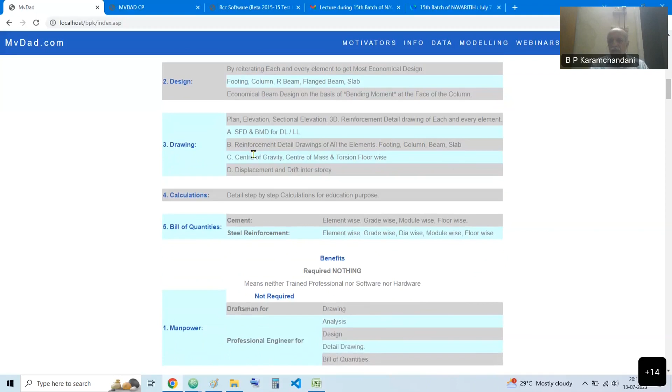These features are 5-in-1. First is analysis, which can do static as well as dynamic analysis for seismic loads. Second is design, by reiterating each and every element to get the most economical design for footing, column, beam, and slabs. It's an economical beam design based on bending moment at the face of the column instead of the center of the column. We are providing drawings for each and every element along with shear force and bending moment diagrams.

Then, earthquake parameters — center of gravity, center of mass, torsion, displacement, and drift. Detailed step-by-step calculations for education purposes, as we used to do during our education, so that students can understand how the results arrived.

Then we are providing the bill of quantities for cement, element-wise, grade-wise, module-wise, floor-wise, and similarly for steel reinforcement.

Benefits: we don't require any specialized manpower to operate this software, and we don't require any special tools — for operating software, drawing software, analysis software, design software, RC detailed drawing software, or bill of quantities. All these features are included in our MvDad.com.

As it is cloud-based, multi-location, multi-access, multi-user can use the software from their mobile phone or laptop, subject to internet connectivity. It's a green revolution — environment friendly and paperless. Modeling is totally automatic, which I will show you. We require only basic data: whether the building is residential or commercial, where it is located, floor heights, basement height, ground floor height, plinth height, foundation depth, bearing capacity, soil type, grade of steel, and grade of concrete.

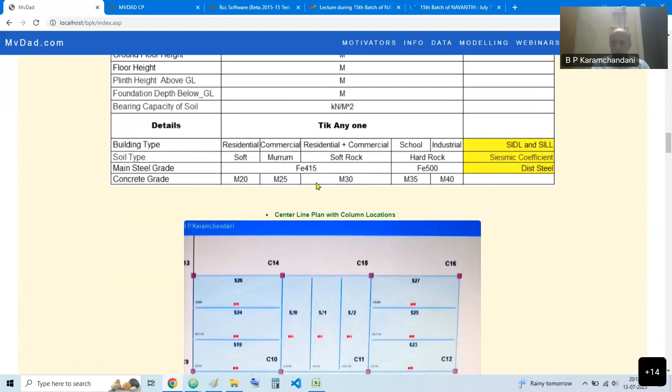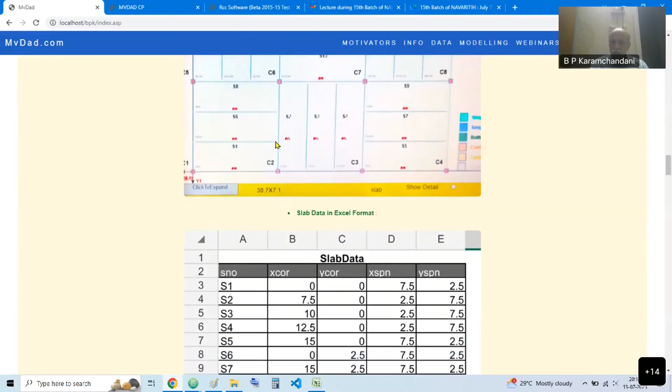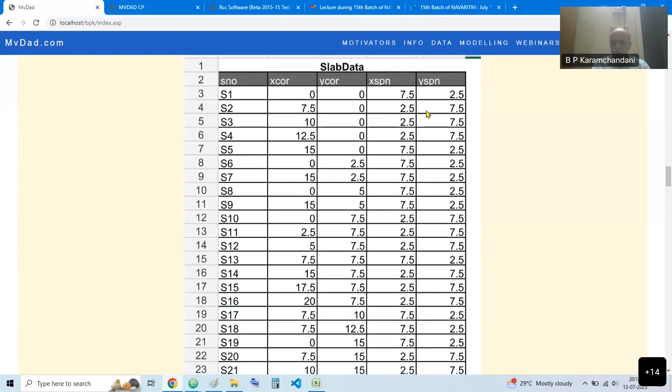From the architect's point of view, we require only the center line plan with column locations, either in drawing format or Excel format. We require the slab data: X coordinate, Y coordinate, span in X direction and span in Y direction. Similarly, column locations. These are the basic requirements for the new project.

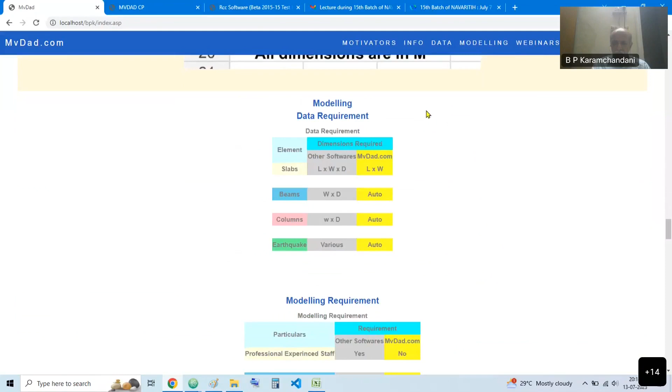Our modeling is auto modeling. Generally, all software requires all 3 dimensions - length, width, depth. Whereas in our case, we require only the slab dimensions, length and width. For the rest of the elements, beams and columns, we don't require anything from the user. By auto modeling, each and everything will be taken care of by the software.

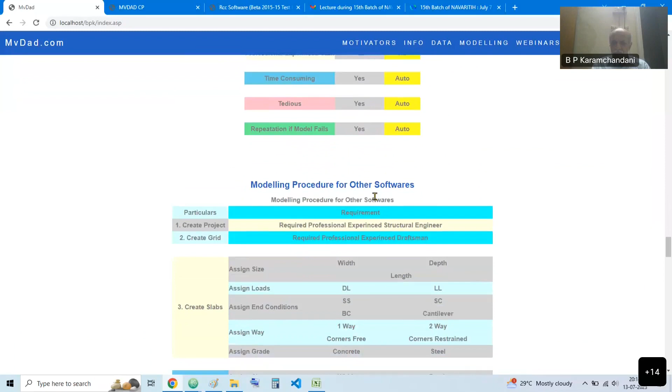This is the general procedure of what the software requires and how they actually execute it. Due to time shortage, we will overlook it.

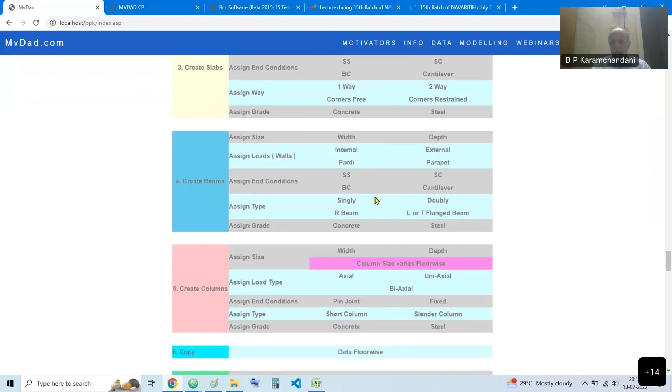One can have a look at our home page. Till now, we have covered 18 webinars across India, and we have provided them local support. And we have provided the actual program, exclusive program for students' education purpose. Now we will create...

Now we will create one simple project for understanding purposes - how the data is entered and created for the new project. We'll keep the name BMTPC, password BMTPC. Just noting down, time is 2016, so we can see within how many minutes we can create the data for the new project.

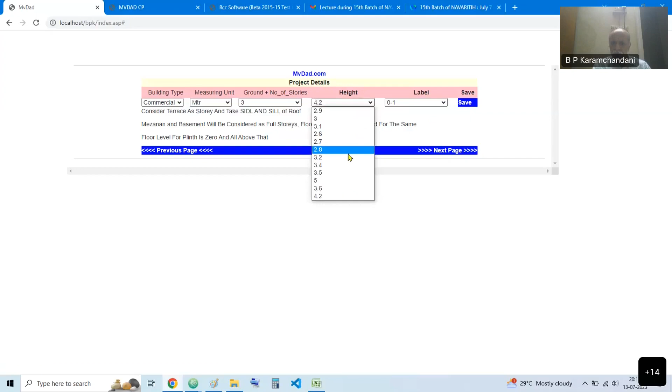Now building type - we are considering commercial building. Measuring units, meter. We are considering a G+3 building for the demo purpose, and we have the option for variable height for variable floors. We are considering 4.2 meters for 0 to 1 as it is commercial. For the rest of the floors, we are considering 3.2 meters - 1 to 2, 2 to 3, 3 to terrace.

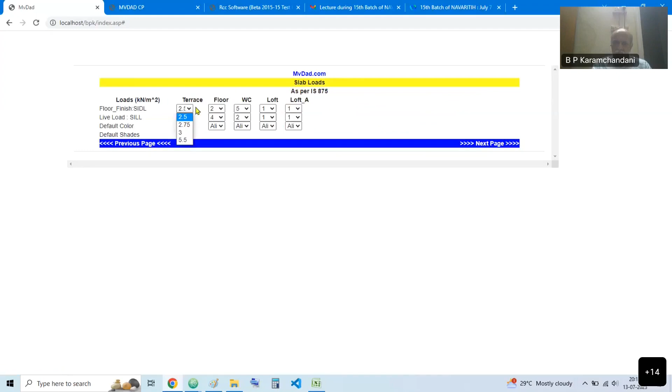As we have selected commercial building, according to the commercial building as per IS code 875, the terrace load and floor loads are incorporated by default. The user has the liberty to increase the loads, but is not supposed to decrease the load prescribed by the IS code. We are considering IS code loads for the demo purpose.

For walls: external wall 0.23 meter floor to floor height, internal wall 6 inch floor to floor height, parapet wall 0.23, height 0.9 meters. Plinth height, we are considering 0.6 above ground level. Foundation depth, we are considering 0.75 below ground level. The type of soil which we require for earthquake analysis is hard bearing capacity - user requires only the bearing capacity of the soil, which is variable as per the site situation.

Till now, we have selected the data from the drop-down boxes. Only the bearing capacity of the soil have we entered manually. That means minimum data is entered by the user, so there are minimum chances of error. We are considering M25 grade of concrete, main steel Fe415.

There are 3 ways of creating the drawings. Just let me show you the first option - to create the slabs from the Excel format. They are nothing but slab data, BMTPC, in Excel format. They are in this format: X coordinate 0,0, Y coordinate, X span, Y span. All the spans we are considering as 5 meters at the distance of 5 meters, with number of slabs 12.

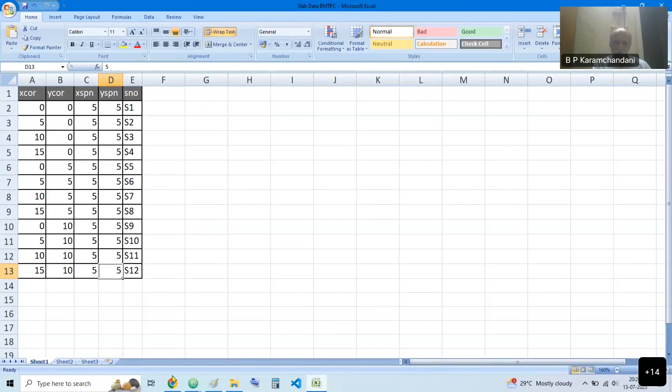Now we will give rights to the user to proceed further. These are the options we provide as per the user - for project management, all the rights; for site engineers, limited rights; for site supervisor, limited rights. Up to terrace, the project is active. So now we can log in this.

Within 5 minutes - 2021, we started at 2016 - within 5 minutes we have uploaded the data. Let's check what data we have entered for that project. We have selected commercial building, unit meters, number of stories 3, variable floor heights 4.2, 3.2, slab loads as per IS 875, wall thickness, width for earthquake, location of the building Assam, foundation plinth height, foundation height, bearing capacity of soil, grade of concrete. That means only these data are required from the user, and within 5 minutes any layman can enter them.

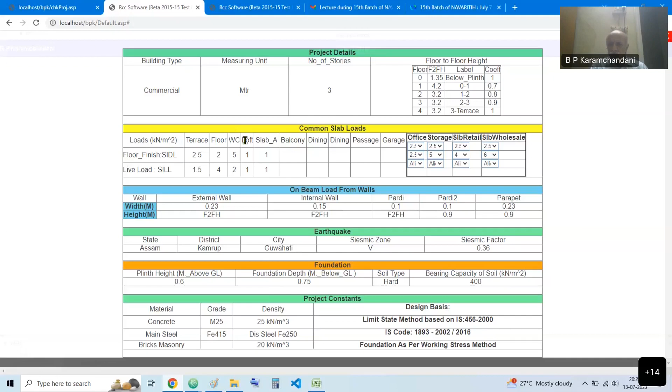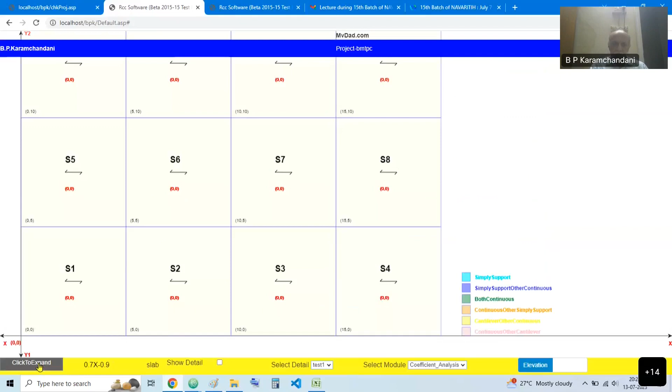This is the floor menu. We will select floor one. Main menu - click anywhere, main menu will appear, slide. We have entered the data in Excel format, and those data converted into graphic format. That means it's very easy to convert the data. Now we will copy all the floors. On canvas, copy floor from first. Floor 3, copy from 1. Floor 2, copy from 1.

Ground floor, floor 0, copy from 1. We have created the slabs on all the floors: 0, 1, 2, 3, 4.

Now we will go to the next column on canvas. Just click on the location twice: column from 0 to top, rectangular in Y direction or in X direction. We are considering corner columns in rectangular format, and they should move in the Y direction.

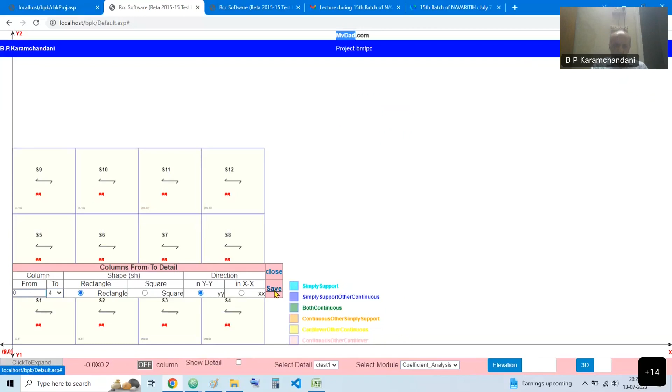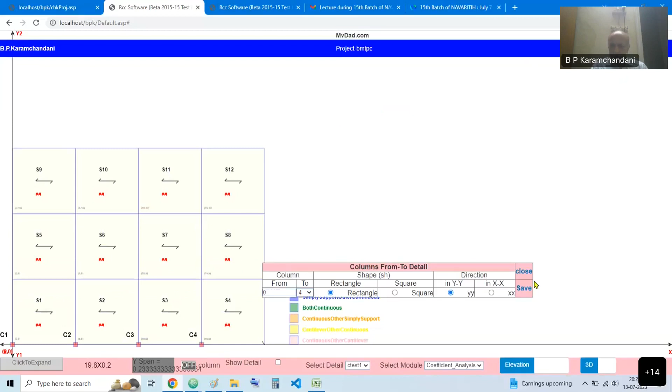Created 1, second, third, fourth, fifth, sixth. All these internal columns we are considering square.

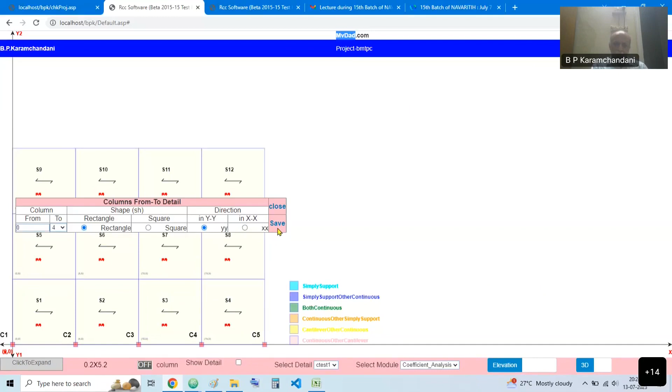Number of options are available. User can select as per the site situation.

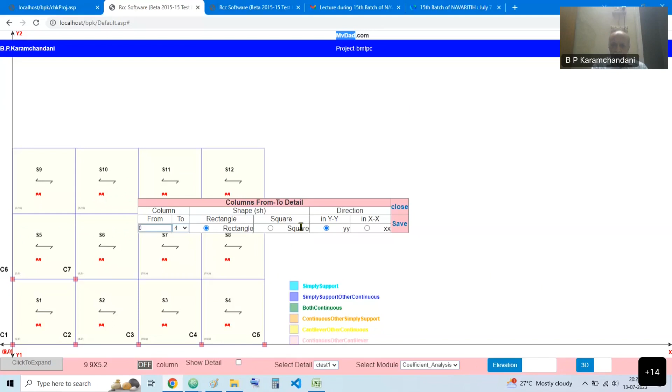We are considering rectangular. We have created 10 columns. Rest 10 columns we have to create.

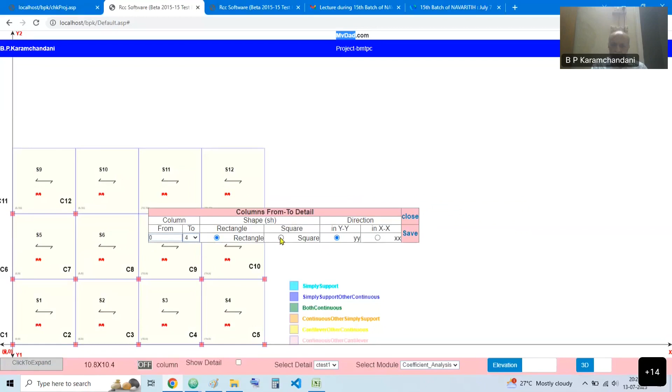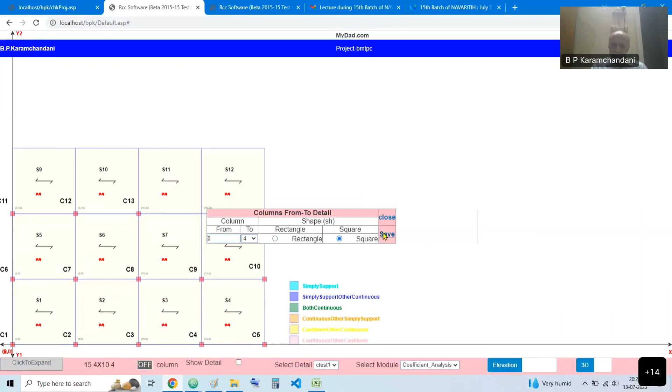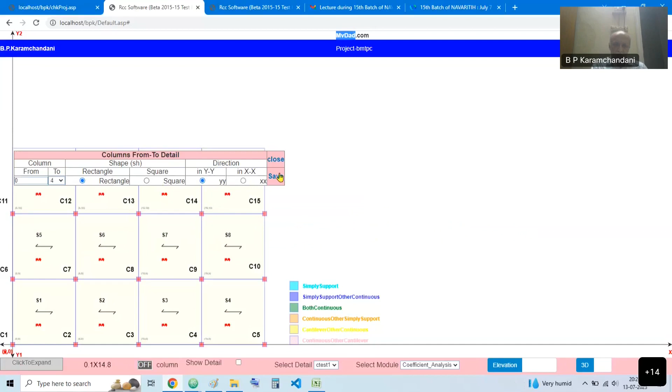Again, square, square, square, rectangular, rest of the columns all rectangular. Last column 20, rectangular.

On the canvas, we will check whether all the columns are created on all the floors: ground floor, first floor, second floor, third, terrace.

We'll go to the next, beams. This is the unique auto beam generation. We will generate the beams automatically for all the floors. Software will take care of the beams.

For slabs, we required only the X coordinate and Y coordinate, and X span and Y span. For column, we require only the location where the column is situated. And third, for beam, we require nothing. This is the part of the auto modeling. Just we'll turn off the canvas and check whether all the beams are created on all the floors.

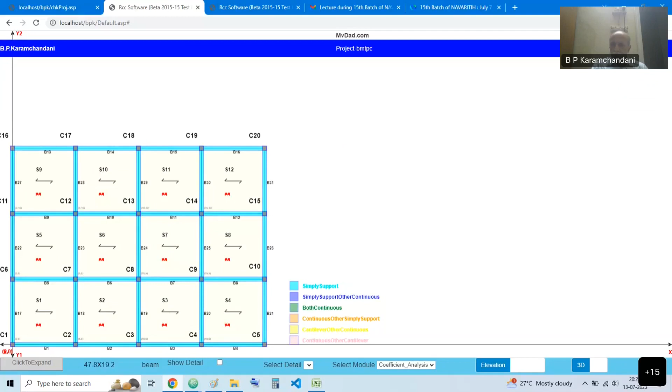We refresh that so that during any internet problem, the data should be protected. Now all the data which we have created is saved on the server.

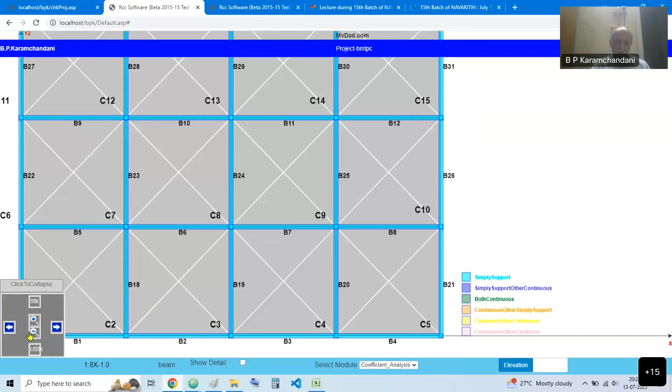Yes, we will check columns and beams, whether they are correctly created or not. 20 columns, 12 slabs, 31 beams are there on ground floor, first floor, second floor, third floor, then last terrace.

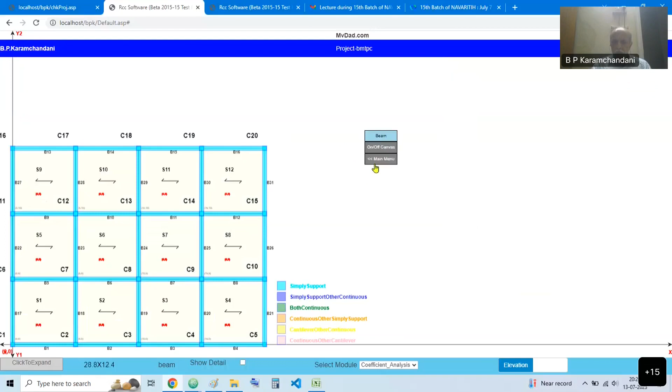Just I will show you how the slab end supports are decided, continuity is decided, loads are transferred. Select floor, slab.

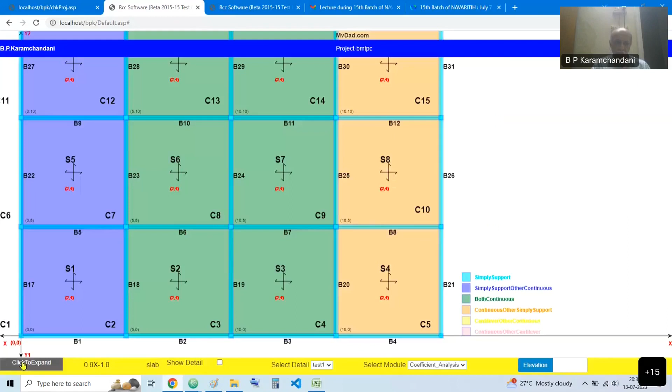All the slabs are two-way. As per the standard, LX by LY, LY by LX, less than 2 should be two-way. And their end conditions: slab S1 is simply supported, other continuous, though we are matching the colors. S2, S3 are both continuous. S4, left side continuous, right side simply supported.

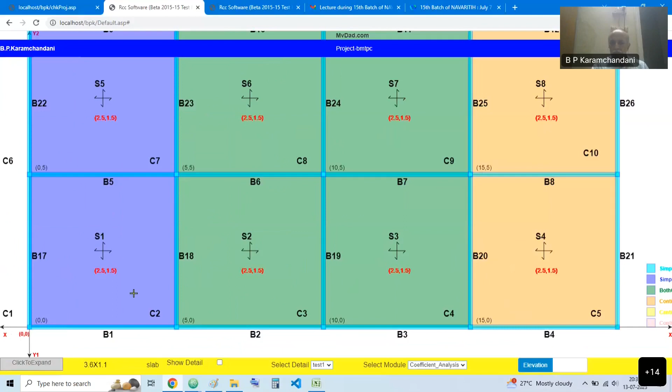And loads are transferred as per the IS code for floors, that I will show you: 2 and 4 for terrace, 2.5 and 1.5. That means on all floors, loads are transferred, one way and two way decided, and conditions decided. Similarly for beams and columns, each and everything will be taken care of by the software.

We have already created one project which is online available. You can log in from your mobile or on your system. Here, the same similar project, we already did the analysis and it is available on your.

I will show you the rest of the features of this software on the screen. Demo is the project name, demo BMTPC, password is BMTPC. We are logged in.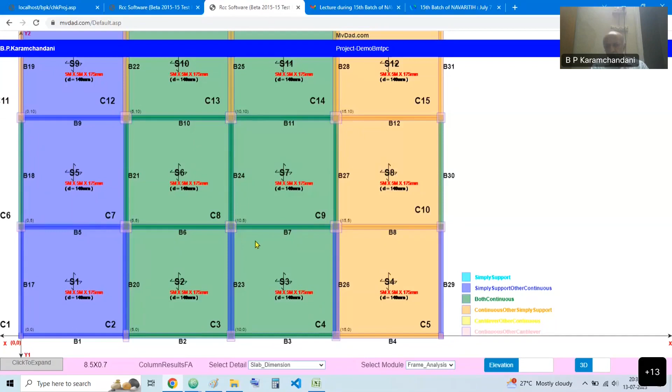Now we are online, the project which is available on your mobile also. That means within 15 minutes, we have created the project and we have saved the data.

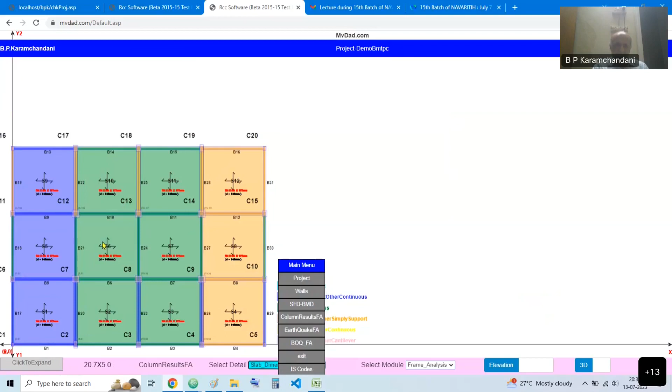Now on this screen, this menu is for floor. For each and every floor, you can get the data. And this select detail menu will provide the results of all the elements of all the floors: slab dimension, slab steel schedule, beam details, column details. Just you click on that menu, data will be displayed on the plan.

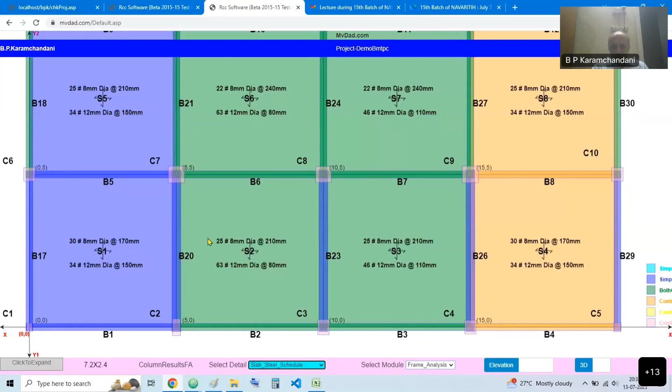Slab dimensions: thickness 175, whereas from the user we have taken only the LX and LY. Effective depth is 140. Each and everything is calculated by the software. Slab steel schedule: we required number of bars, 25 bars at 8 mm dia at 210 mm center to center. Similarly for all the floors, for all the elements.

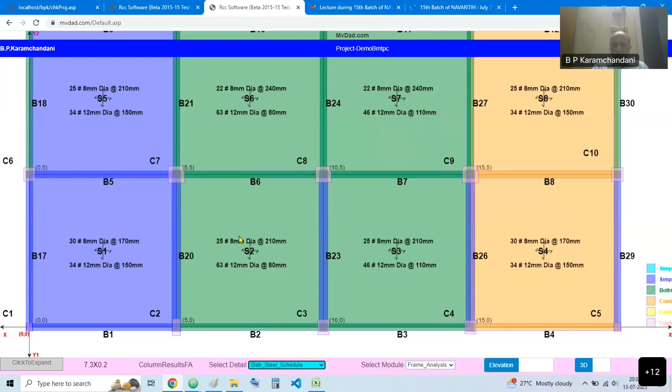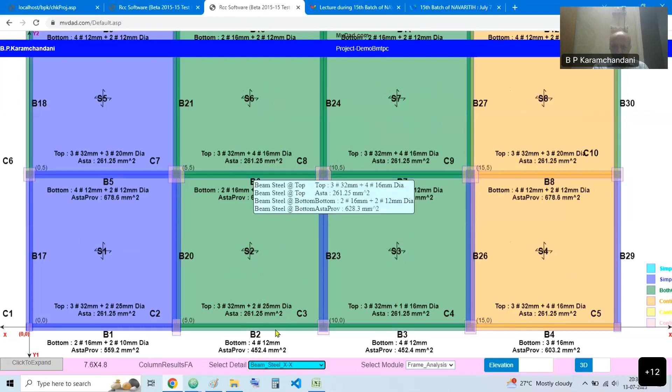Slab results, then beam results, beam shear, beam steel in XX. All the beams in the XX direction will be displayed, or on hover also you can see. Beam in Y direction, in elevation, you can see the values.

Sorry to interrupt you, sir. Can we be fast somewhat? Yeah, yes, I will give you. It is already 8:30. I got it.

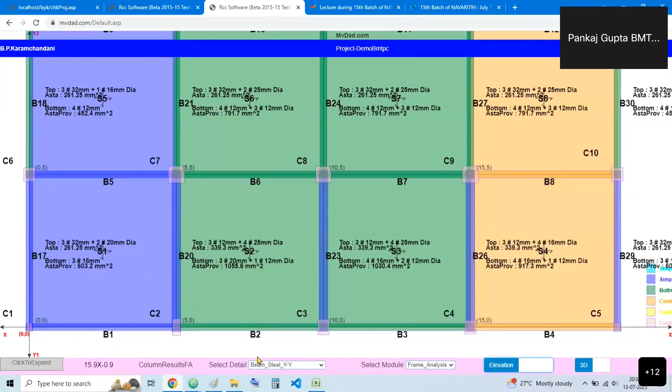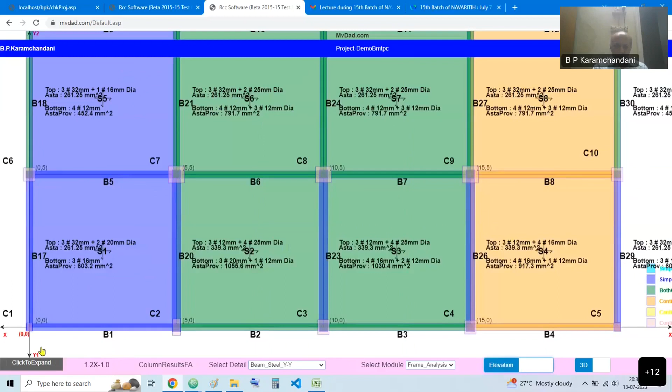Next is the, within 5 minutes I will complete it. What are the features? Just I want to show you. Right, sir?

Click on any element and you will get this menu for the load calculation. For each and every element, you can get the calculation, as we are doing for the education purpose.

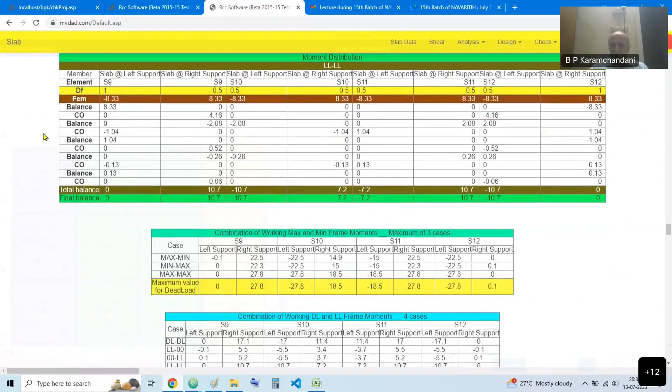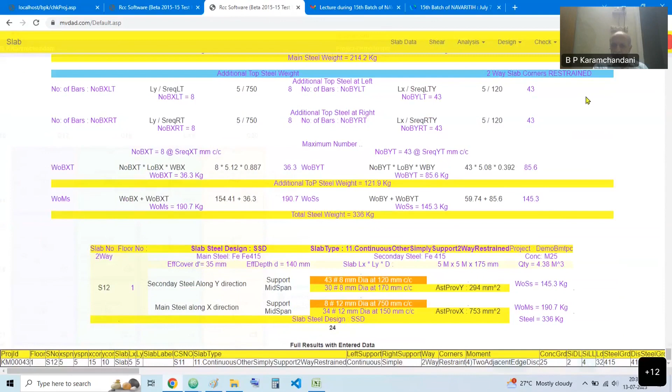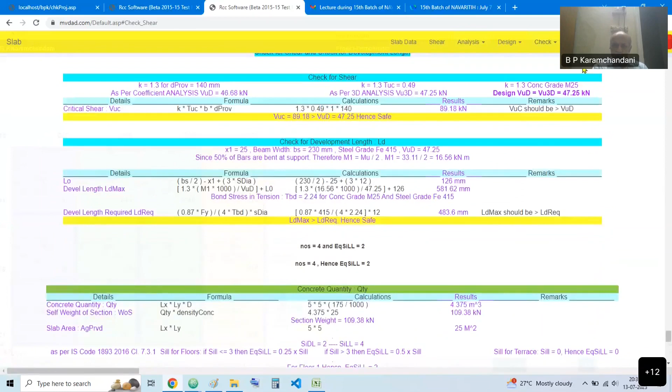Steps: full calculation, frame analysis, 3D and 2D analysis, results, bending moment, shear force, then detailing and design. For each and every element, you have this menu which can help you check that page. Similar way, for beam, you can see calculations.

Each and every calculation is on runtime, real runtime. It's not a PPT, so that all the data can be displayed. Here, each and every time the data is calculated.

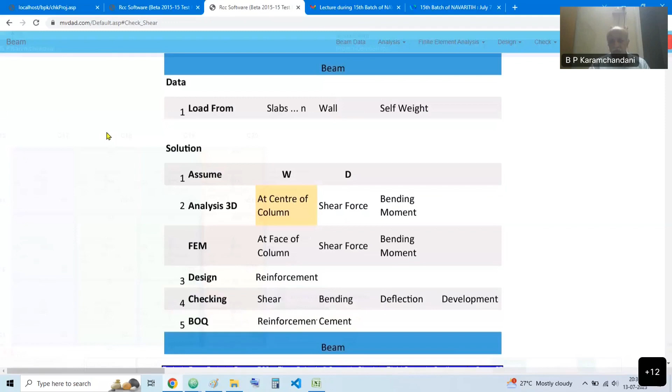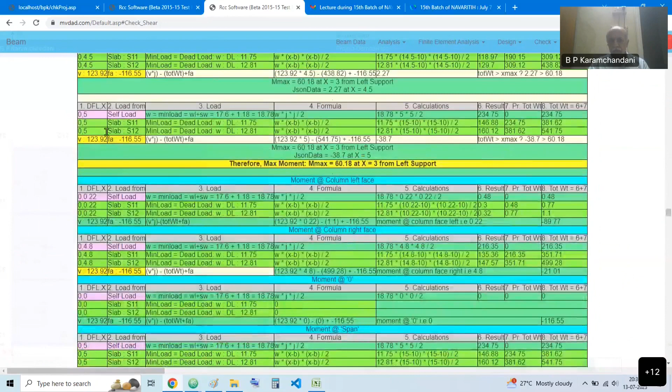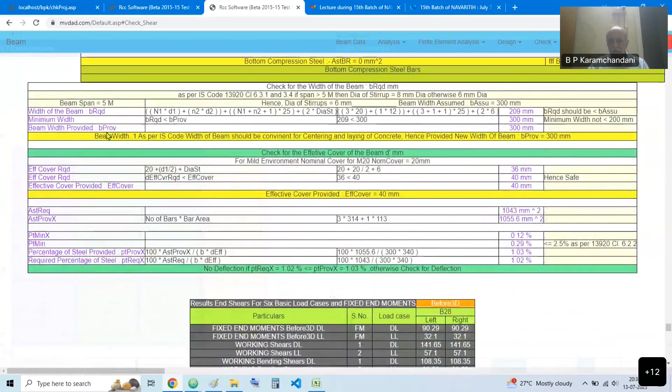3D analysis, then finite element analysis - this is the detailed finite element analysis. Analysis is over, then as per the shear force and bending moment, steel design, bending moment and shear force, steel design, then check. Similar way for columns and for footing.

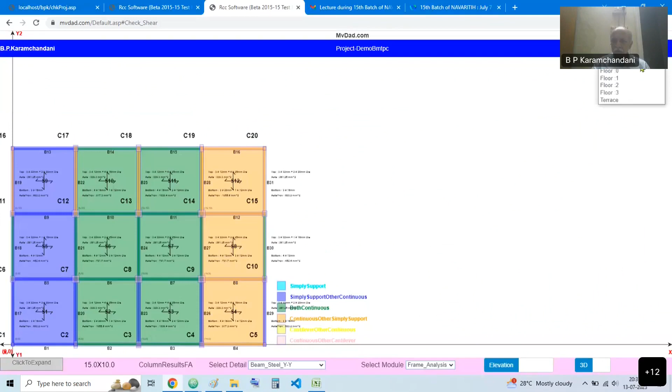Now we'll see the steel drawings, how the steel drawings are available for each and every element. That means tabular format results, graphic format results, summary results for beam steel. Similar way for column steel. Then footing, similar way - click on that footing, steel drawing, calculations.

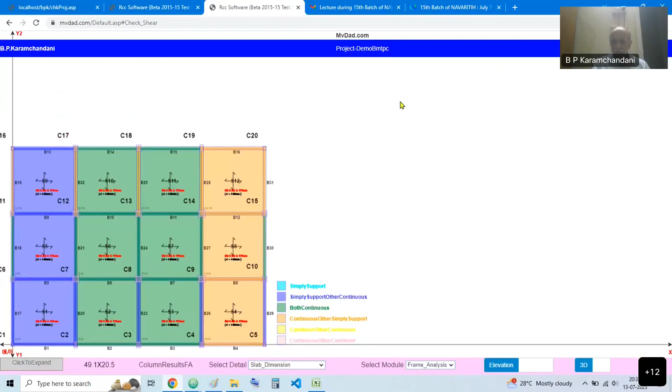Now we are going to the earthquake analysis, which is the most important. Just have a look at that shear force and bending moment diagram - X direction, Y direction, span.

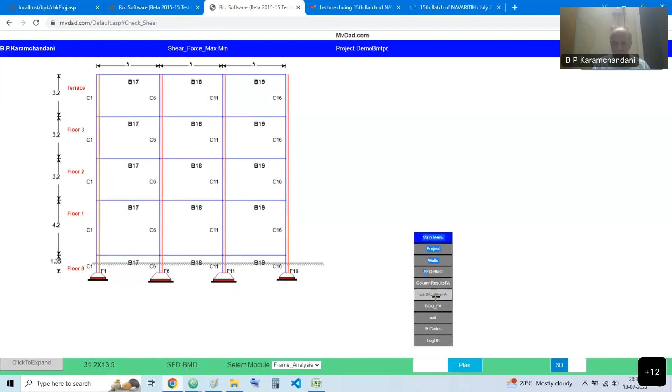We'll go to the earthquake analysis. Make the structure so that center of mass and center of rigidity should coincide - that means try to make it maximum symmetrical. Then drift X.

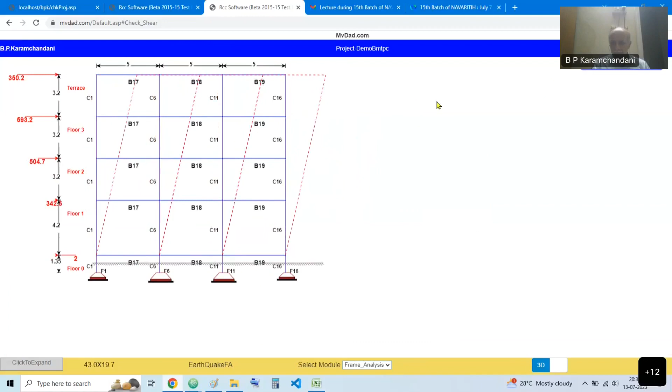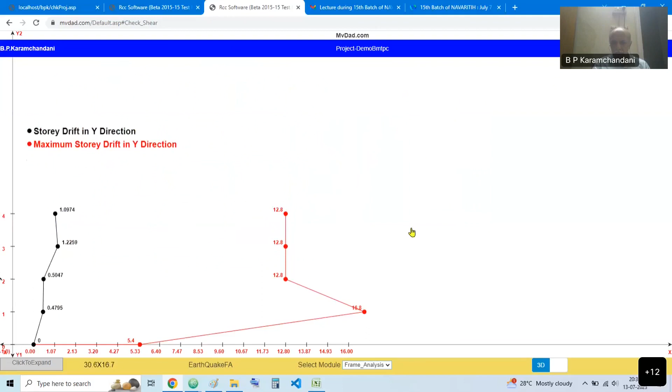Lateral forces in X direction, lateral force in Y direction, and drift in X direction - maximum allowable drift. Drift in Y direction, displacement in X direction, displacement in Y direction, torsion, torsion in Y.

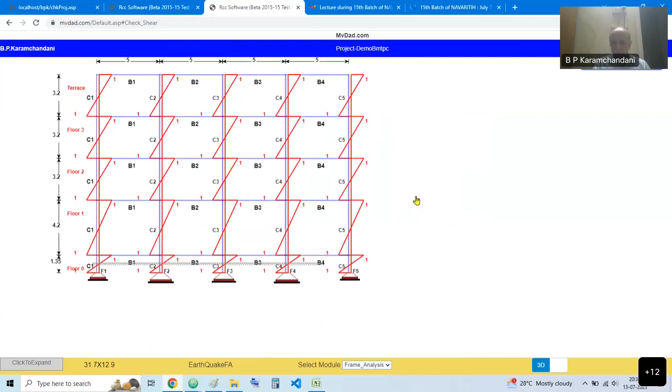Final is the calculation - full project's earthquake calculations from loading, seismic zone, response spectrum, importance factor, static analysis, dynamic analysis - again dynamic analysis in three forms: absolute method, CQC method, SRSS method. Full detailed calculation is available.

I have shared the project access with you. You can log in at any time from your mobile or laptop and access this full project that is available to you. For full project, we are doing the earthquake analysis.

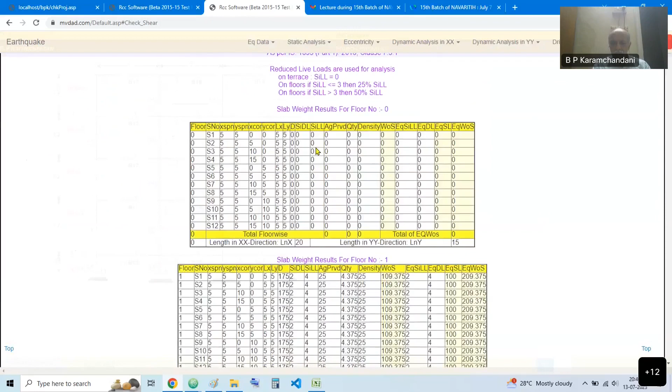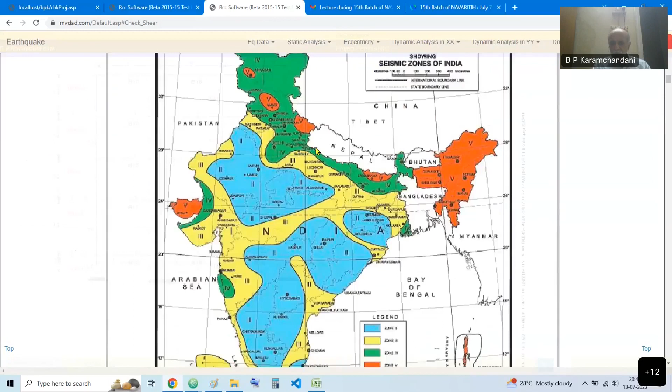These are the steps which we have followed, again as per the IS code: superimposed load conditions, slab loads, column loads, beam loads. Then we have calculated the total earthquake load as per the map, seismic zone, seismic factor, then natural period.

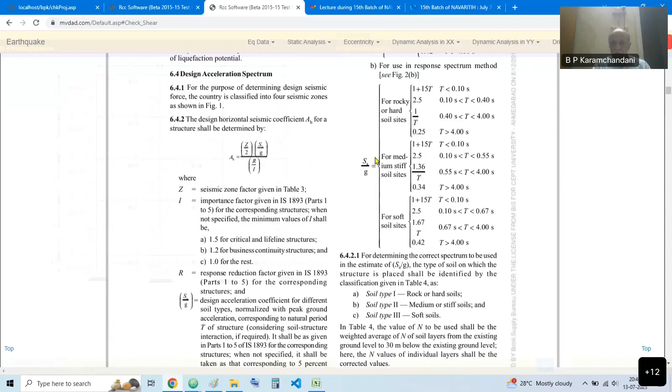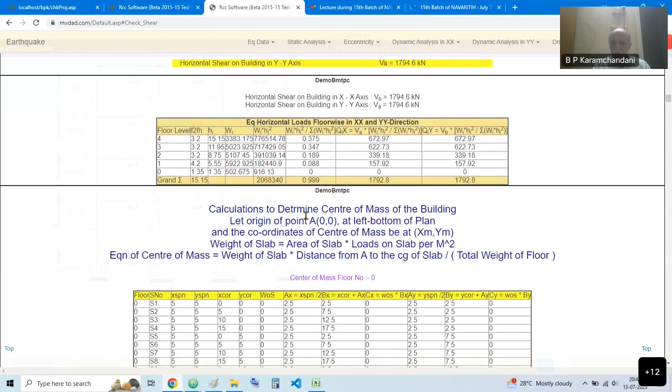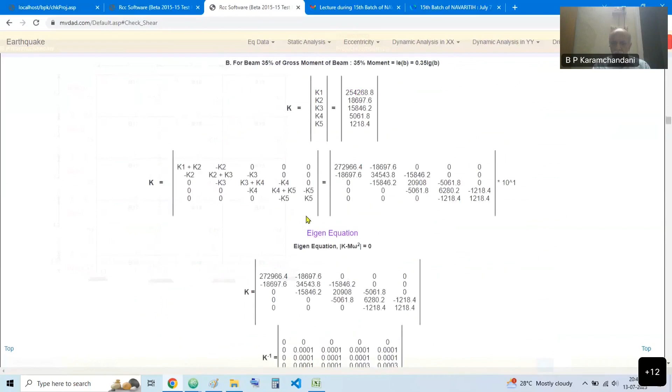We have calculated the natural period, seismic coefficient in X direction, seismic coefficient in Y direction, lateral force as per the static method, then center of mass, center of rigidity. Then the dynamic analysis as per the Eigen stiffness matrix and Eigen value vector and Eigen vector to find out the natural time period. Multi-degree of freedom - step-by-step calculation is shown.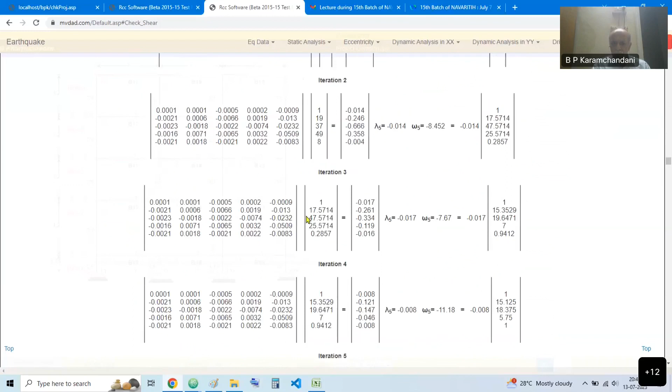Then modes, number of modes, mode shape - mode 1, mode 2, mode 3, mode 4, mode 5.

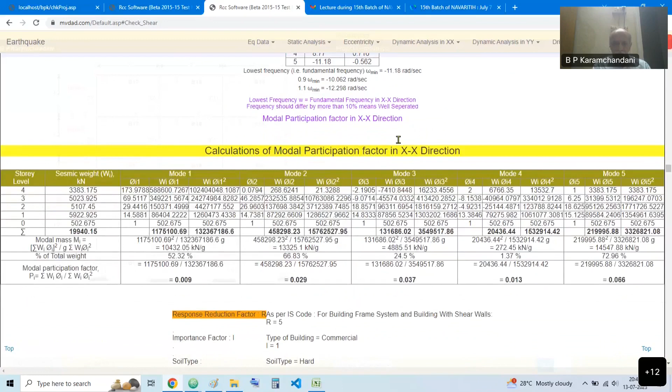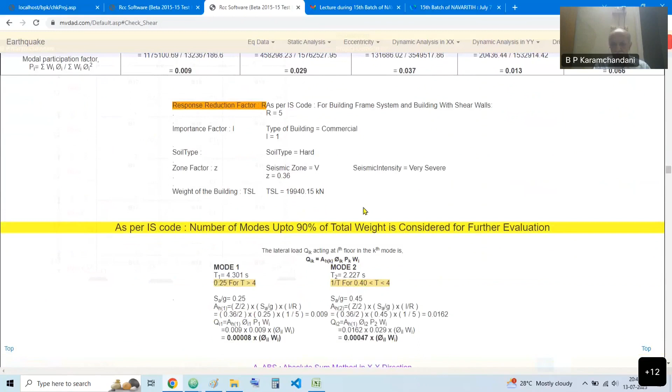Again, as per the IS code, we have calculated dynamic response factor, reduction factor, soil type, weight - number of modes up to 90% of total weight is considered for further evaluation as per the IS code. As per our analysis, mode 1 and mode 2 suffice, hence the structure is to be considered for mode 1 and mode 2 for further evaluation.

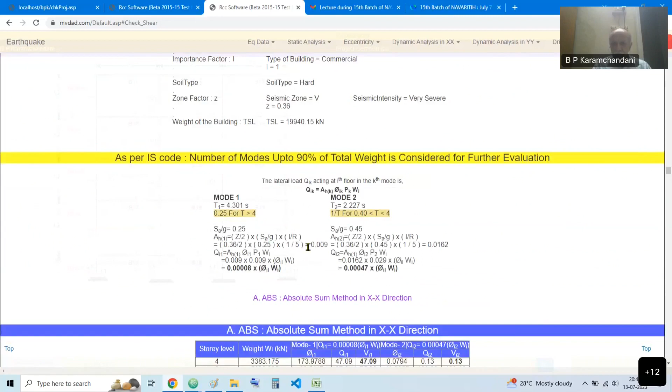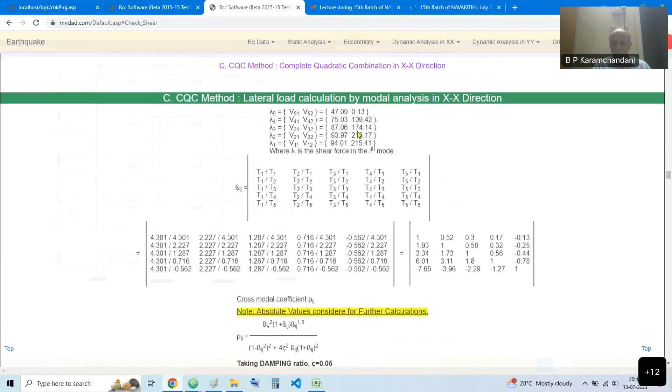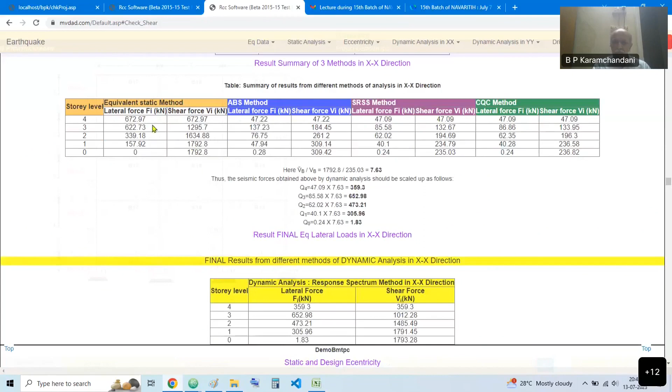Absolute method, SRSS method, CQC method - all the 4 values, we have to jack up the values as per the static so that dynamic value should not be less than the equivalent static method. According to that ratio, we have evaluated this shear force and lateral force in the XX direction and Y direction.

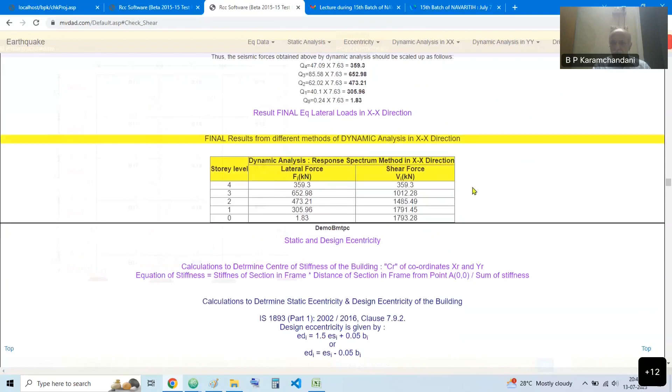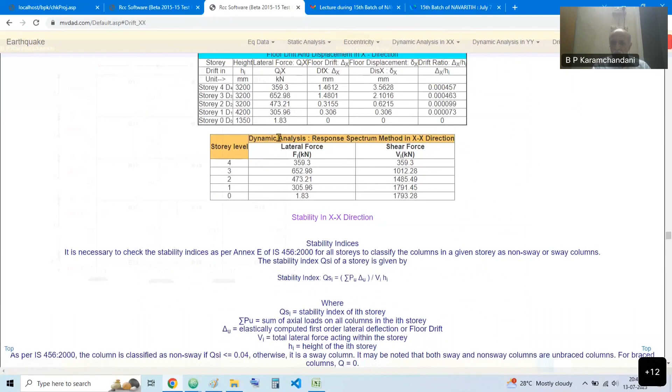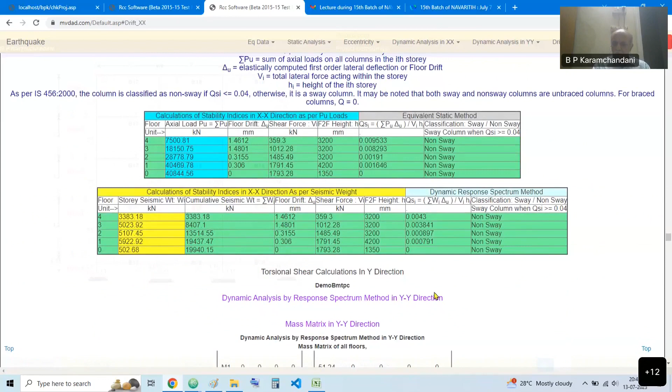Now we will go to the drift in the X direction - drift, lateral force, floor drift, floor displacement, drift ratio, their stability indices, whether it's sway and non-sway. We have calculated both as they are non-sway, hence whatever elements we have selected, they are safe as per the earthquake analysis. This is the similarity for YY direction, so we will just ignore that for this purpose.

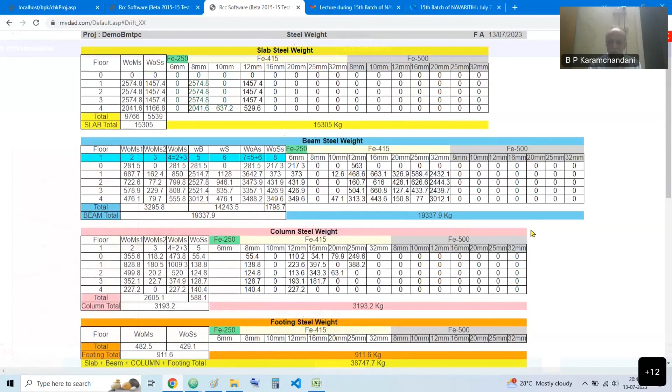Slab steel, floor wise, dia wise, grade wise - 15305 kg for slabs. For beams, floor wise, dia wise, grade wise - 19337. For column, similar way, footing, and for execution purpose, floor wise material requirement, total quantity - it's available at the time of analysis and design. You can export it in the Excel format.

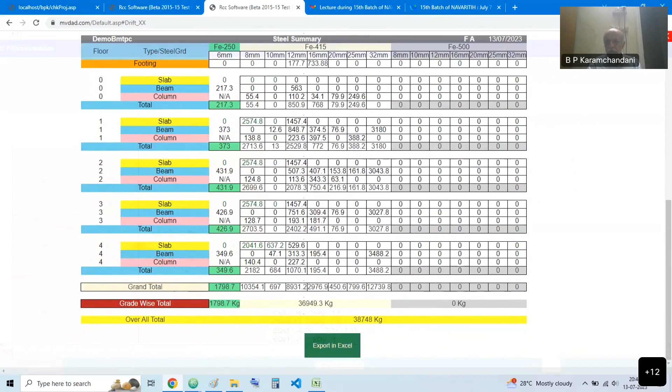I have covered all the points. Similar way, you can see the cement, so we will ignore it. You can log in and can have - IS codes are also available, just click for your reference purpose.

I hope I have covered my full software and explained it so you understand the features available in this.

Thank you, sir, for the presentation. I think it is a wonderful software, and I see it in a very simple manner. The beauty of this software is its simplicity and ease of use and understanding. Thank you, sir.

How is it, according to you, different from the many softwares already available in the market? First, it is online based. Till now, as per my knowledge, there is no such software available online.

Second, for each and every other software, they have only one function - for drawing purpose you have different software, for analysis purpose different software, for quantity purpose all are different. In our case, it's 5-in-1, all available in this project. Also, other software requires technical know-how to use, but in this case it's very simple. Within 5 minutes we enter the data, and within 15 minutes we have created the project.

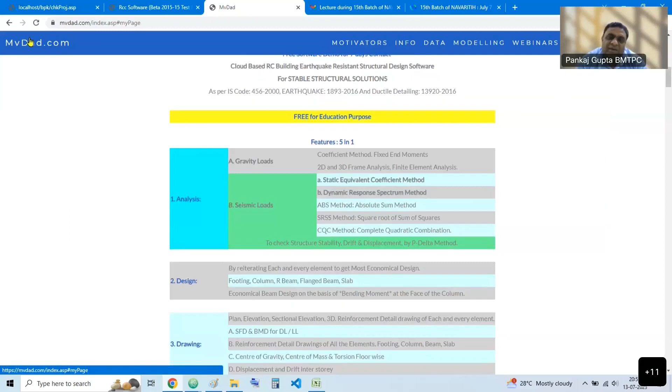Sir, I think there is no question, and I think that was a very learning experience for all of us. It is good to see that in this era where so many multinational companies have developed software, you have come out with your own experience and knowledge, long experience, and developed such a simplified software. To be very frank, it is giving the BOQ also, and you have covered every aspect of the design.

I hope this software gets validated and vetted by some good technical institutions and becomes a learning tool for students and also for professionals in future. I will be thankful to you if you guide me to get it validated.

I think it was an opportunity - this is the first time we have invited you, and our participants have also come to know about this software. They will spread word of mouth to other people they are in touch with, and this is how it will spread further.